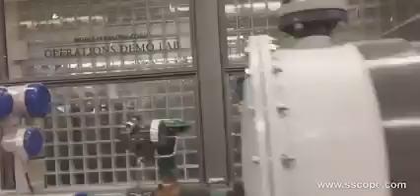20 liters per minute of water flowing into the vessel, and about 4 liters per minute of oil flowing into the vessel. Typically in industry, we do about a 10 to 1 water to oil ratio. So we're a little bit above that. But you can see right now our interface is pretty well right in the middle of the vessel.

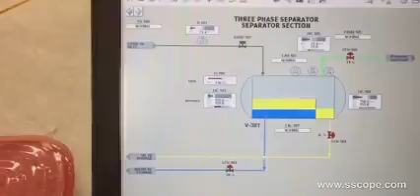I'll just bring you over to our DCS right now. I just recently made a step change, bringing it down to 150 millimeters, bringing the interface down. You can see we have everything controlling.

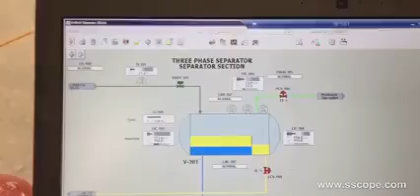Our oil level over here is controlling around, you can see it's dropping off right now because we made that step change. So this whole level is coming down, and there's a lack of oil right now, so we're dropping off. But it was set for 55 millimeters, and the valve's shut right now, just waiting for more oil to spill over. So we made that step change, and now we're just waiting for the level to drop here. So we're going to see if everything works out.

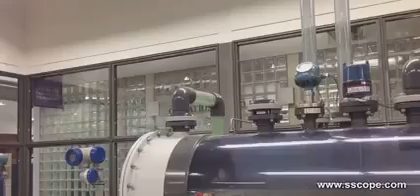We were having issues with our guided wave radar, which is this guy right here. If we have too much emulsion there, it can't pick up the interface, and it loses control of the process. So with the proper flow into the vessel there, we have probably a 3 to 1, 4 to 1 ratio of water to oil right now. It seems to be controlling quite good. Well, after our step change is done here, we'll check to see how it did.

So you can see we made our step change from 175 millimeters down to 150 right here, and the interface level came down. This is our controller output here. Came down to eventually match the set point. So it appears we have our interface level control loop tuned up quite well. It takes at least close to 10 minutes for the loop to stabilize after a set point change.

I'll just close this. We'll go back here and have a look at the tuning parameters we set this to, just so we have those documented. We have our gain at 3, our reset at 120 seconds, and our rate set for 15 seconds. It's a pretty slow process, so we're using rate or derivative as well.

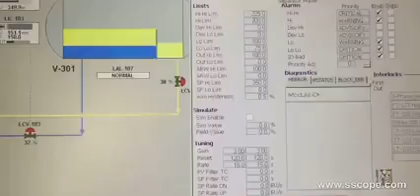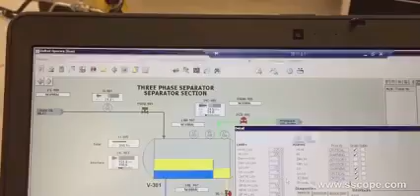Also notice here our high alarm, our first high alarm rings in at 200, and our low rings in at 100. So we only have 100 millimeters to play here, about 4 inches of room. If we go outside those limits, if we go too high, our interface probe can't measure the interface. There needs to be a minimum of 4 inches on top of the water for it to measure properly.

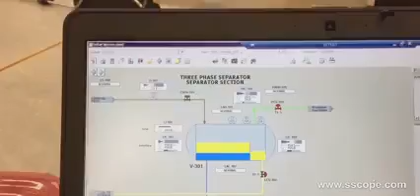And if we go down too low, it'll see the end of the probe, and that tends to mess up. Our process will shut down on a low level just so we don't have any oil going into our water tank. So, probably one of the slowest loops on our process out of all of our trainers as well. Got it tuned up. I wanted to document it, take a video.

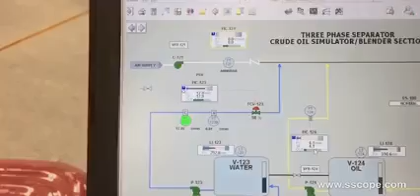Also, I can just go over to our other screen here just to show the ratio that we're blending the oil at right now with the water. We've got our water running at 18 liters per minute, and we've got our oil running at 4 liters per minute. You can see right there. So that's the optimum ratio for the way that the interface level loop is tuned right now.

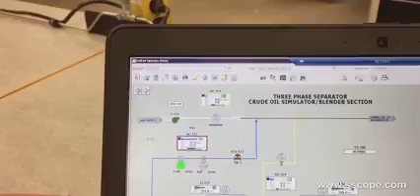We could try adjusting this, but I wouldn't recommend adding much more oil than we have, just because it creates too much of an emulsion. And this is pretty realistic of what you'd see in industry. In industry, it'd actually be more like probably only 2 liters per minute at the 20 liter per minute water rate, a 10 to 1 ratio. So we're actually a little bit high for what industry would normally have.

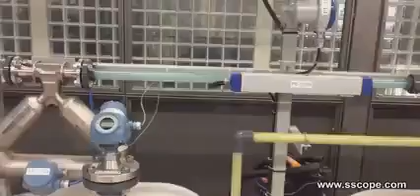So the process is up and running fine. I'll just take you around over here so you can see that our feed here is mostly water. It's fairly blue in color, and the yellow is the oil. If you look back here, you can see our water and our oil lines right here. So these are our supply tanks, water and oil.

We feed in, mixed with our air coming in from our blower over here in our mechanical room beside us. Mix, come into the 3-phase separator, settle out. Oil sits on top, water on the bottom. We dump the water off back over to our water tank, and the oil spills over this weir here.

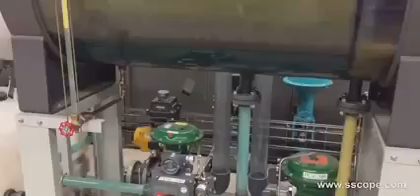We've got a level controller up here that is opening and closing our oil valve, which is right down here, and sends the oil back over to the oil tank. So the process seems to be working quite good. We just need to find the right oil and water flow rates into our vessel.